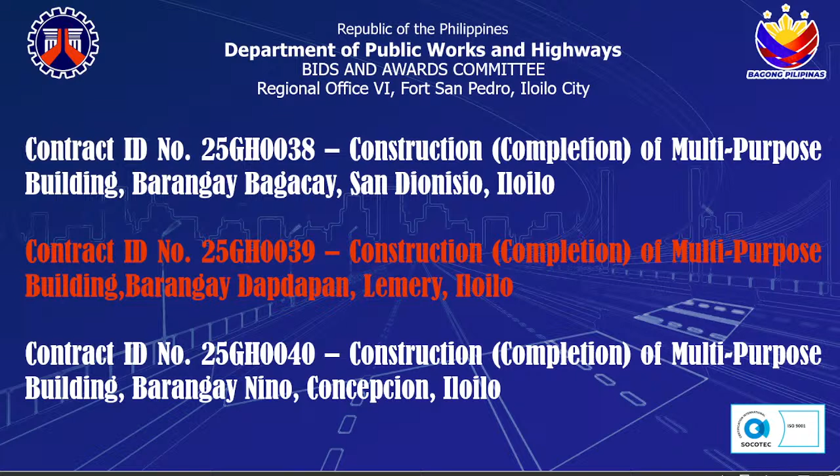And contract ID 25GH0041, construction completion of the multipurpose building, Barangay Agnaga, Concepcion, Iloilo. The technical working group will now present the data of these projects. Please go ahead.

For contract ID number 25GH0032, construction completion of multipurpose building, Barangay Almeñana Elementary School, Almeñana, Lemery, Iloilo. Location: Barangay Almeñana Elementary School, Almeñana, Lemery, Iloilo. Implementing Office: DPWH, Iloilo 3rd District Engineering Office. Funding Source: FY 2025 National Expenditure Program.

Approved budget for the contract: 1,980,000 pesos. Scope of works: completion of multipurpose building, including 3 layers bleacher with roofing both sides, canopy, repainting steel and concrete, 100mm thick concrete slab overlay for the gym, 75mm thick concrete slab overlay for the stage, gutter with downspout for gym and canopy, and electrical works. Contract duration: 100 calendar days.

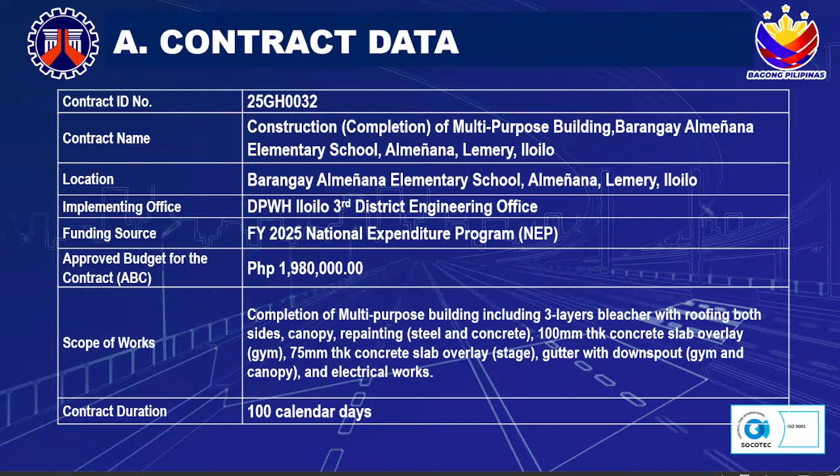For the major category of works: buildings, construction without piles, low-rise, concrete frame, 1 to 5 stories. For similar categories of works: buildings, construction with piles, high-rise, concrete frame, cast-in-place piles; buildings, construction with piles, low-rise, concrete frame, cast-in-place piles; buildings, construction with piles, high-rise, concrete frame, driven piles; buildings, construction with piles, low-rise, concrete frame, driven piles; buildings, construction without piles, high-rise, concrete frame; buildings, industrial plant, low-rise; buildings, industrial plant, high-rise; buildings, industrial plant, medium-rise. For the qualifier: buildings, construction without piles, low-rise, concrete frame, 1 to 5 stories.

Example of qualifier: not applicable.

For the list of key personnel: 1 project manager should have a minimum 5 years of total work experience and a minimum 5 years of experience in similar works. The same applies to 1 project engineer, 1 project inspector, 1 materials engineer, 1 safety officer, and 1 foreman.

For the list of key equipment units: 1 bagger mixer, 1 bar cutter, 1 bar bender, 2 welding machines, 2 cutting outfits, 1 generator set, and 2 concrete vibrators. Please take note of the capacity.

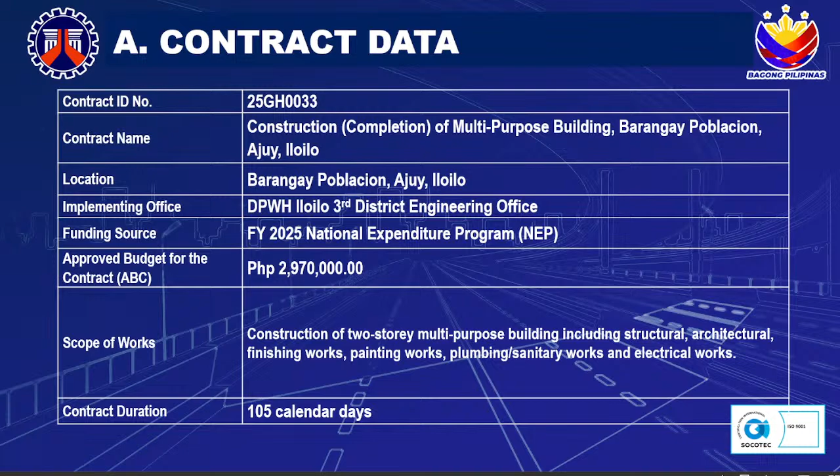Contract duration: 105 calendar days. For the major category of works: buildings, construction without piles, low-rise, concrete frame, 1 to 5 stories.

For similar categories of works: buildings, construction with piles, high-rise, concrete frame, cast-in-place piles. Buildings, construction with piles, low-rise, concrete frame, cast-in-place piles. Buildings, construction with piles, high-rise, concrete frame, driven piles. Buildings, construction with piles, low-rise, concrete frame, driven piles.

Buildings, construction without piles, high-rise, concrete frame. Buildings, industrial plant, low-rise. Buildings, industrial plant, high-rise. Buildings, industrial plant, medium-rise. For the qualifier, major category of works: buildings, construction without piles, low-rise, concrete frame, 1 to 5 stories. Example of qualifier: not applicable.

For the list of key personnel: one project manager should have a minimum 5 years of total work experience and a minimum 5 years of experience in similar work. The same applies to one project engineer, one project inspector, one materials engineer 1, one safety officer, and

one foreman. For the list of key equipment units: one bagger mixer, one bar cutter, one bar bender, 2 welding machines, one cutting outfit, one generator set, 2 concrete vibrators, and 1 jackhammer. Please take note of the capacity.

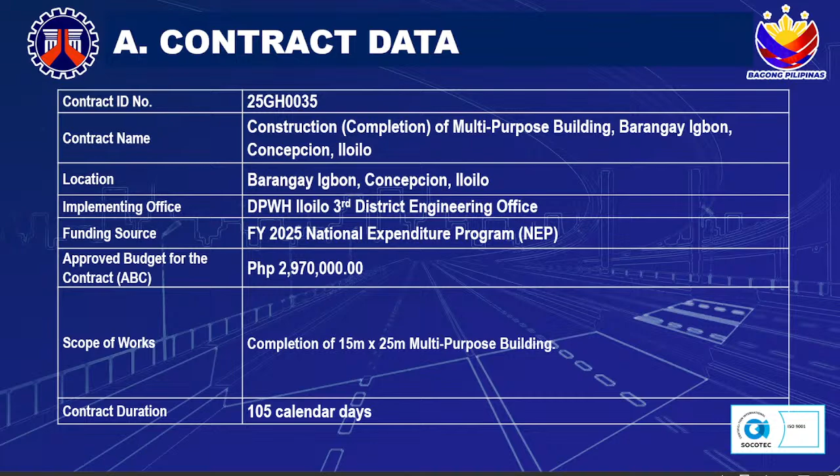Contract duration: 105 calendar days. For the major category of works: buildings, construction without piles, low-rise, concrete frame, 1 to 5 stories.

For similar categories of works: buildings, construction with piles, high-rise, concrete frame, cast-in-place piles. Buildings, construction with piles, low-rise, concrete frame, cast-in-place piles. Buildings, construction with piles, high-rise, concrete frame, driven piles. Buildings, construction with piles, low-rise, concrete frame, driven piles. Buildings, construction without piles, high-rise, concrete frame.

Buildings, industrial plant, low-rise. Buildings, industrial plant, high-rise. Buildings, industrial plant, medium-rise. For the qualifier, major category of works: buildings, construction without piles, low-rise, concrete frame, 1 to 5 stories. Example of qualifier: not applicable.

For the list of key personnel: one project manager should have a minimum 5 years of total work experience and a minimum 5 years of experience in similar works. The same with one project engineer, one project inspector, one materials engineer, one safety officer, and one foreman.

For the list of key equipment units: one bagger mixer, one bar cutter, one bar bender, two welding machines, one cutting outfit, one generator set, two concrete vibrators, and one jackhammer. Please take note of the capacity.

For contract ID number 25GH0036, construction completion of multipurpose building, Barangay Calaigang, San Rafael, Iloilo. Location: Barangay Calaigang, San Rafael, Iloilo. Implementing office: DPWH, Iloilo 3rd District Engineering Office. Funding source: FY 2025 National Expenditure Program. Approved budget for the contract: 2,970,000 pesos. Scope of works: construction of 10 meter by 14 meter multipurpose building.

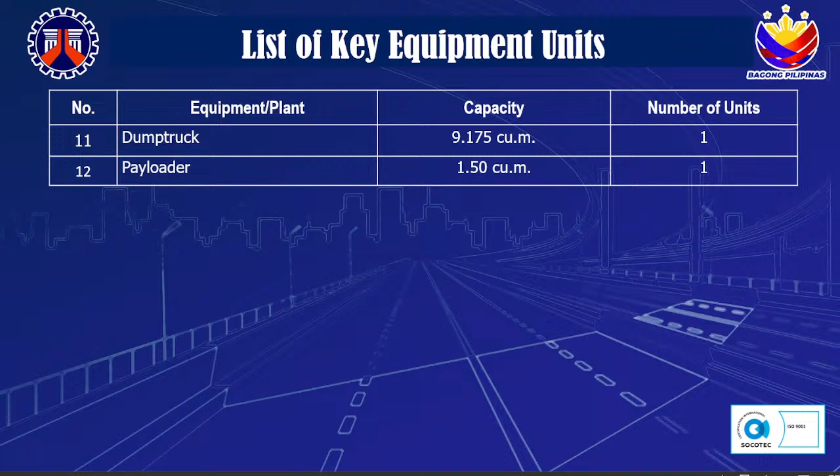For the list of key equipment units: two bagger mixers, one bar cutter, one bar bender, two welding machines, two cutting outfits, one generator set, two concrete vibrators, one backhoe, one jackhammer, one air compressor, one dump truck, and one payloader. Please take note of the capacity.

For contract ID number 25GH0037, contract name: construction completion of multipurpose building, Barangay Tanduyan, AJUY, Iloilo. Location: Barangay Tanduyan, AJUY, Iloilo. Implementing office: DPWH, Iloilo 3rd District Engineering Office. Funding source: FY 2025 National Expenditure Program. Approved budget for the contract: 2,970,000 pesos.

Scope of works: construction of 15 meter by 20 meter multipurpose building, including earthworks, plain and reinforced concrete works, painting works for steel, and roofing works. Contract duration: 105 calendar days.

For the major category of works: buildings, construction without piles, low-rise, concrete frame, 1 to 5 stories. For similar categories of works: buildings, construction with piles, high-rise, concrete frame, cast-in-place piles. Buildings, construction with piles, low-rise, concrete frame, cast-in-place piles. Buildings, construction with piles, high-rise, concrete frame, driven piles. Buildings, construction with piles, low-rise, concrete frame, driven piles. Buildings, construction without piles, high-rise, concrete frame.

Buildings, industrial plant, low-rise. Buildings, industrial plant, high-rise. Buildings, industrial plant, medium-rise. For the qualifier, major category of works: buildings, construction without piles, low-rise, concrete frame, 1 to 5 stories. Example of qualifier: not applicable.

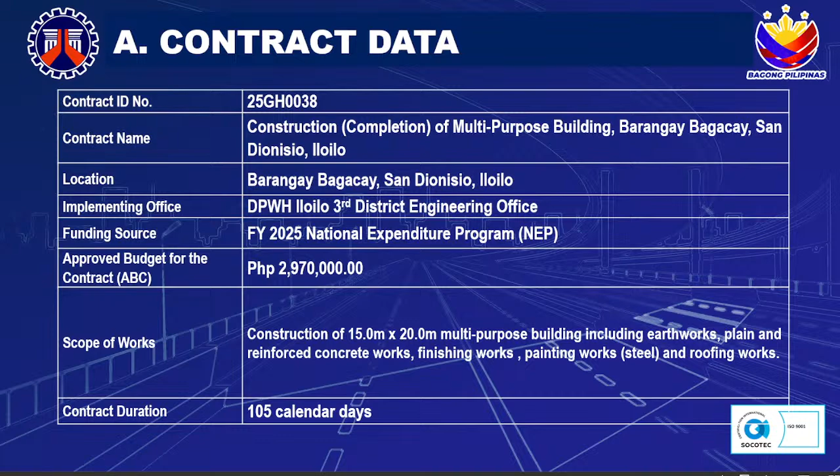Painting works for steel, and roofing works. Contract duration: 105 calendar days.

For the major category of works: buildings, construction without piles, low-rise, concrete frame, 1 to 5 stories. For similar categories of works: buildings, construction with piles, high-rise, concrete frame, cast-in-place piles. Buildings, construction with piles, low-rise, concrete frame, cast-in-place piles. Buildings, construction with piles, high-rise, concrete frame, driven piles. Buildings, construction with piles, low-rise, concrete frame, driven piles. Buildings, construction without piles, high-rise, concrete frame.

Buildings, industrial plant, low-rise. Buildings, industrial plant, high-rise. Buildings, industrial plant, medium-rise. For the qualifier, major category of works: buildings, construction without piles, low-rise, concrete frame, 1 to 5 stories. Example of qualifier: not applicable.

List of key personnel: one project manager should have a minimum 5 years of total work experience and minimum 5 years of experience in similar works. The same with one project engineer, one project inspector, one materials engineer, one safety officer, and one foreman.

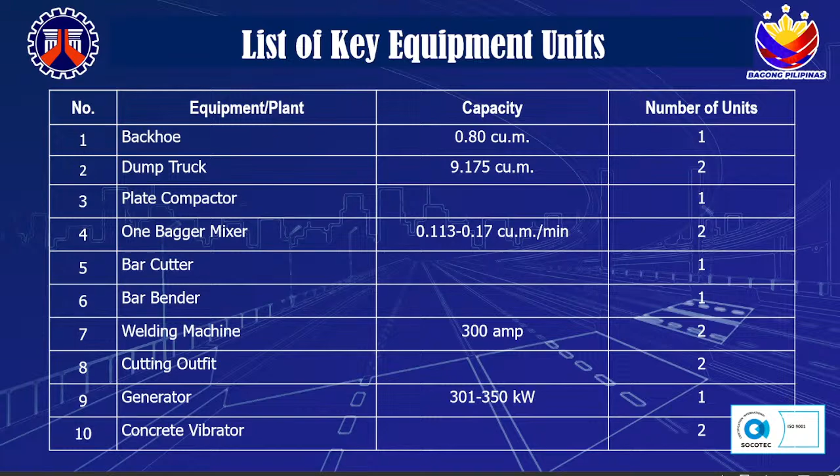For the list of key equipment units: 1 backhoe, 2 dump trucks, 1 plate compactor, 2 one-bagger mixers, 1 bar cutter, 1 bar bender, 2 welding machines, 2 cutting outfits, 1 generator set, and 2 concrete vibrators. Please take note of the capacity.

For contract ID number 25GH0039, contract name: construction completion of multipurpose building, Barangay Dapdapan, Lemery, Iloilo. Location: Barangay Dapdapan, Lemery, Iloilo. Implementing office: DPWH, Iloilo 3rd District Engineering Office.

Funding source: FY 2025 National Expenditure Program. Approved budget for the contract: 2,970,000 pesos. Scope of works: construction of 15-meter by 20-meter multi-purpose building. Work includes excavation, structural works, masonry works, and painting works for steel and masonry. Contract duration: 105 calendar days.

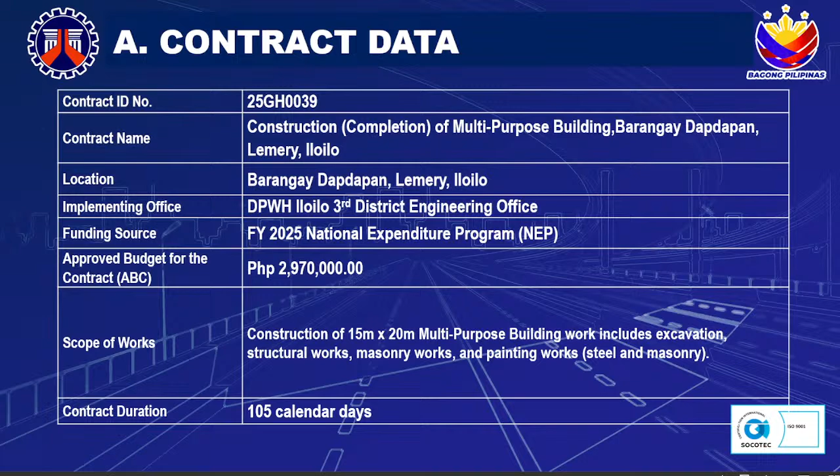For the major category of works: buildings, construction without piles, low-rise, concrete frame, 1 to 5 stories. For similar categories of works: buildings, construction with piles, high-rise, concrete frame, cast-in-place piles; buildings, construction with piles, low-rise, concrete frame, cast-in-place piles; buildings, construction with piles, high-rise, concrete frame, driven piles; buildings, construction with piles, low-rise, concrete frame, driven piles; buildings, construction without piles, high-rise, concrete frame; buildings, industrial plant, low-rise; buildings, industrial plant, high-rise; buildings, industrial plant, medium-rise.

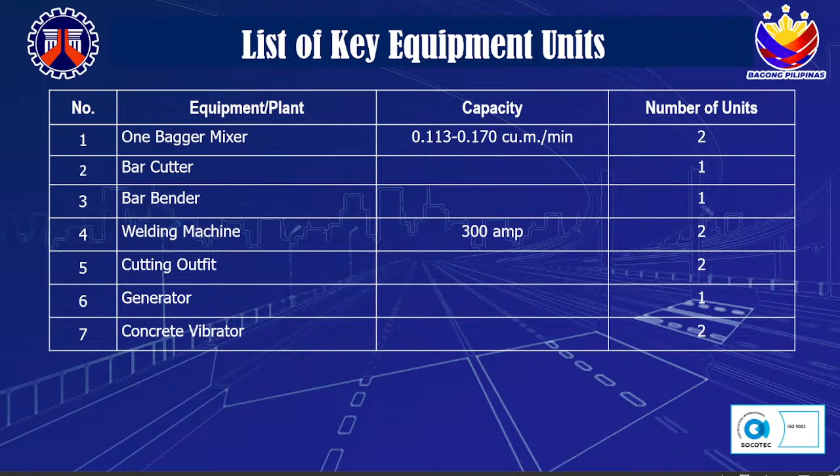For contract ID number 25GH0040, construction completion of multi-purpose building, Barangay Nino, Concepcion, Iloilo. Location: Barangay Nino, Concepcion, Iloilo. Implementing office: DPWH, Iloilo 3rd District Engineering Office.

Funding source: FY 2025 National Expenditure Program. Approved budget for the contract: 2,970,000 pesos. Scope of works: construction of 14-meter by 25-meter multi-purpose building, including earthworks, plain and concrete works, finishing works, roof framing, roofing, and painting works for masonry and steel. Contract duration: 105 calendar days.

For the major category of works: buildings, construction without piles, low-rise, concrete frame, 1 to 5 stories. For similar categories of works: buildings, construction with piles, high-rise, concrete frame, cast-in-place piles; buildings, construction with piles, low-rise, concrete frame, cast-in-place piles; buildings, construction with piles, high-rise, concrete frame, driven piles; buildings, construction with piles, low-rise, concrete frame, driven piles; buildings, construction without piles, high-rise, concrete frame; buildings, industrial plant, low-rise; buildings, industrial plant, high-rise; buildings, industrial plant, medium-rise. For the qualifier: buildings, construction without piles, low-rise, concrete frame, 1 to 5 stories.

Example of qualifier: not applicable. For the list of key personnel: 1 project manager should have a minimum of 5 years of total work experience and a minimum of 5 years of experience in similar works. The same applies to 1 project engineer, 1 project inspector, 1 materials engineer, 1 safety officer, and 1 foreman.

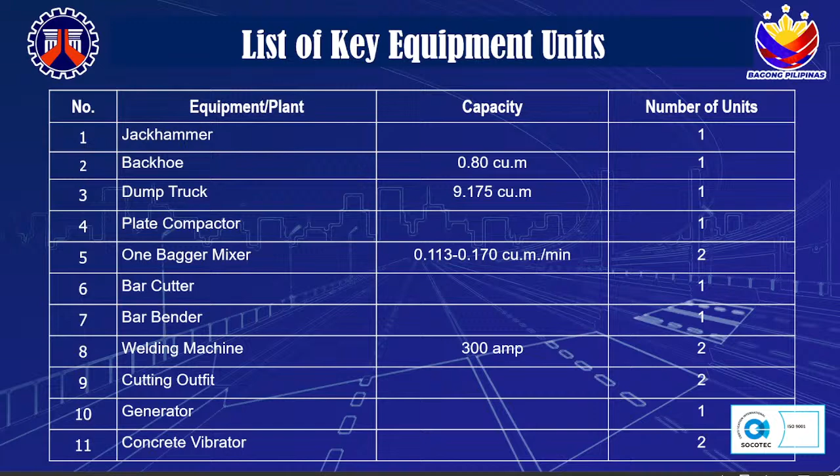For the list of key equipment units: 1 jackhammer, 1 backhoe, 1 dump truck, 1 plate compactor, 2 one-bagger mixers, 1 bar cutter, 1 bar bender, 2 welding machines, 2 cutting outfits, 1 generator set, and 2 concrete vibrators. Please take note of the capacity.

For contract ID number 25GH0041, construction completion of multi-purpose building, Barangay Agnaga, Concepcion, Iloilo. Location: Barangay Agnaga, Concepcion, Iloilo. Implementing Office: DPWH, Iloilo 3rd District Engineering Office.

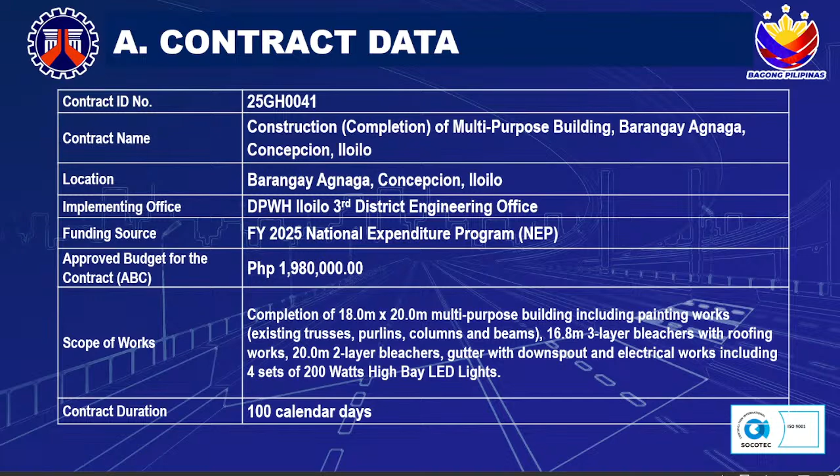Funding source: FY 2025 National Expenditure Program. Approved budget for the contract: 1,980,000 pesos. For the scope of works: completion of 18-meter by 20-meter multi-purpose building, including painting works on existing trusses, purlins, columns, and beams; a 16.8-meter 3-layer bleachers with roofing works; a 20-meter 2-layer bleachers; gutter with downspout; and electrical works including 4 sets of 200-watt high bay LED lights. Contract duration: 100 calendar days.

For the major category of works: buildings, construction without piles, low-rise, concrete frame, 1 to 5 stories. For similar categories of works: buildings, construction with piles, high-rise, concrete frame, cast-in-place piles; buildings, construction with piles, low-rise, concrete frame, cast-in-place piles.

Buildings, construction with piles, high-rise, concrete frame, driven piles. Buildings, construction with piles, low-rise, concrete frame, driven piles. Buildings, construction without piles, high-rise, concrete frame. Buildings, industrial plant, low-rise. Buildings, industrial plant, high-rise.

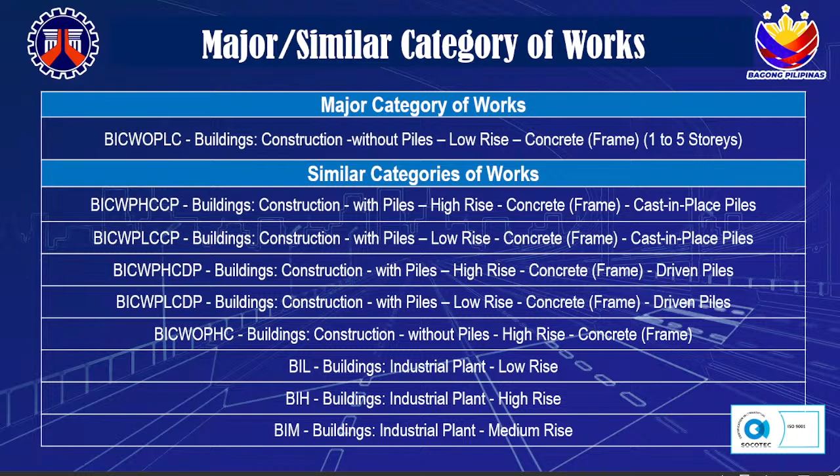Buildings, industrial plant, medium-rise. For the qualifier, major category of works: buildings, construction without piles, low-rise, concrete frame, 1 to 5 stories. Example of qualifier: not applicable.

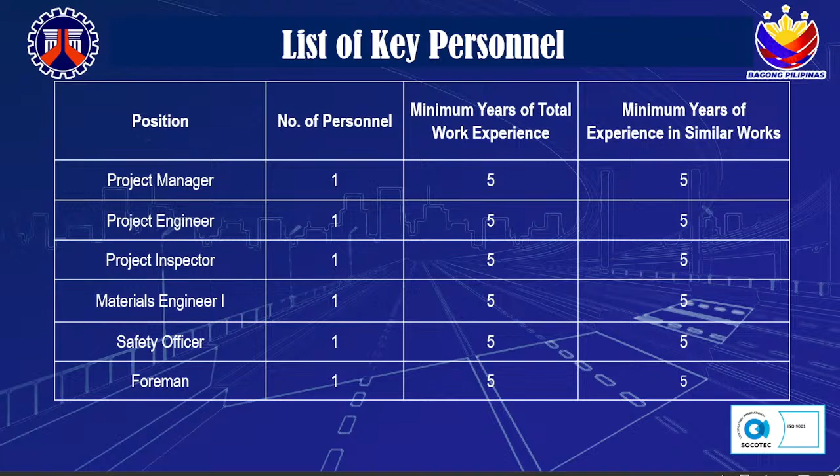The list of key personnel: one project manager should have a minimum 5 years of total work experience and a minimum 5 years of experience in similar works. The same with one project engineer, one project inspector, one materials engineer, one safety officer, and one foreman.

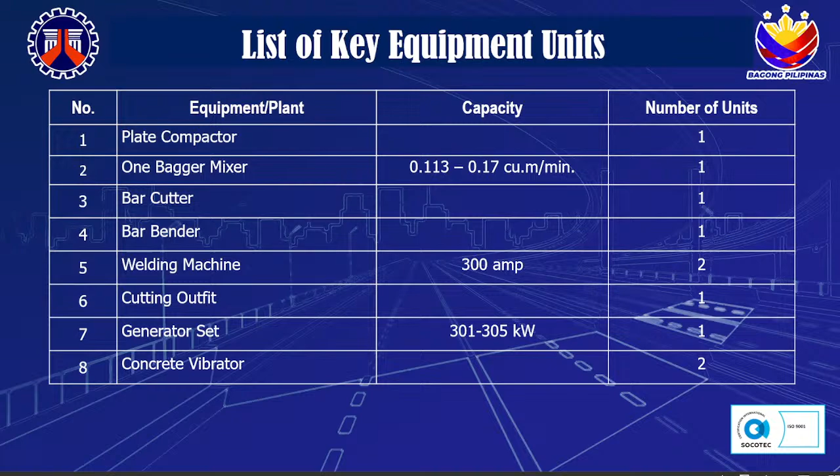For the list of key equipment units: one plate compactor, one bagger mixer, one bar cutter, one bar bender, 2 welding machine, 1 cutting outfit, 1 generator set, and 2 concrete vibrator. Please take note of the capacity.

For the list of key personnel for classification PE2, 10 contracts located within the same region for simultaneous assignments, but with an aggregate cost of 1.5 billion pesos.

For PE1, 10 contracts located within the same region for simultaneous assignments, each costing not more than 150 million pesos, but with an aggregate cost of 1 billion pesos.

For provisional project engineer, 10 contracts located within the same region for simultaneous assignments, each costing not more than 100 million pesos, but with an aggregate cost of 500 million pesos. Only accredited project engineers may be assigned to DPWH projects, subject to the following limits of assignment.

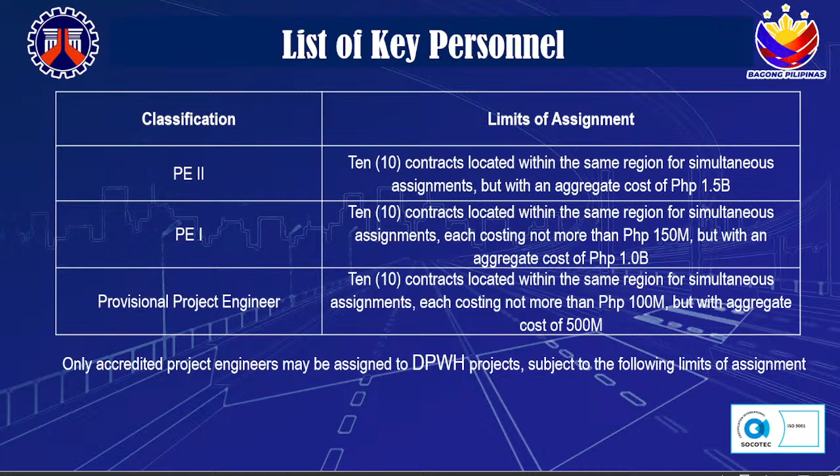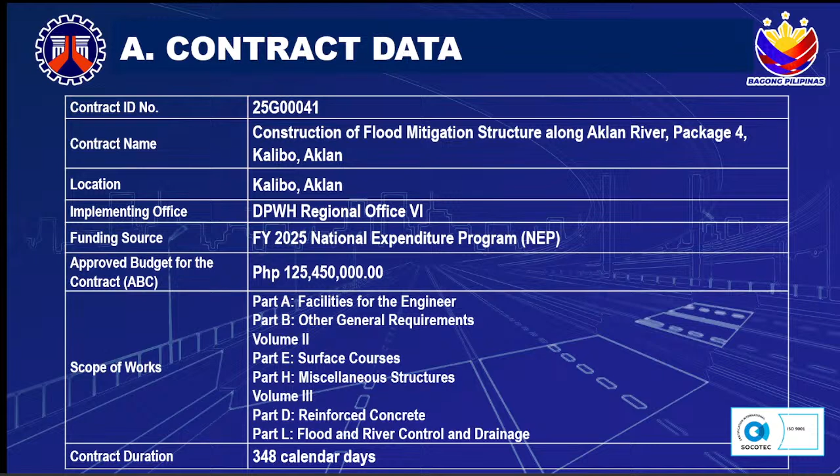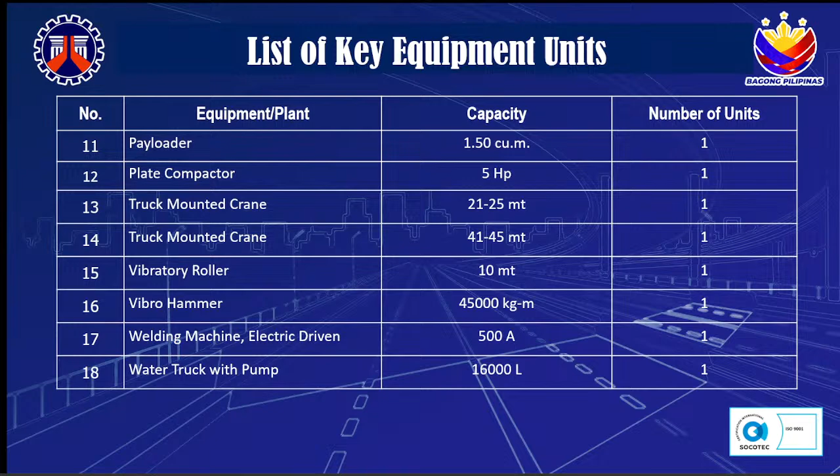Same with one project engineer, one project inspector, one materials engineer, one safety officer, and one foreman. List of key equipment units: one backhoe wheel type, one boom truck, one bulldozer, one cargo truck, two concrete vibrator, two dump truck, one generator set, one motorized road grader, one bagger mixer, one payloader, one plate compactor, one truck mounted crane, one vibratory roller, one vibro hammer, one welding machine electric driven, and one water truck with pump.

Please take note of the capacity. For contract ID number 25G00042, rehabilitation and major repair of the permanent bridges, Imelda Marcos Bridge, along Mandurriao-Sn, Cabatuan Road. Location, Cabatuan, Iloilo. Implementing Office, DPWH Regional Office 6. Funding source, FY 2025 National Expenditure Program. Approved budget for the contract,

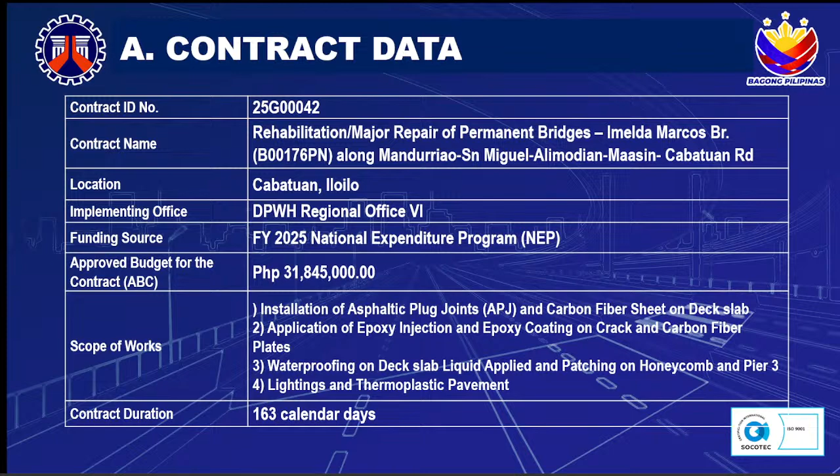31,845,000 pesos. Scope of works: installation of asphaltic plug joints and carbon fiber sheet on deck slab, application of epoxy injection and epoxy coating on crack and carbon fiber plates, waterproofing on deck slab liquid, applied and patching on honeycomb and pier 3, lightings and thermoplastic pavement, contract duration 163 calendar days.

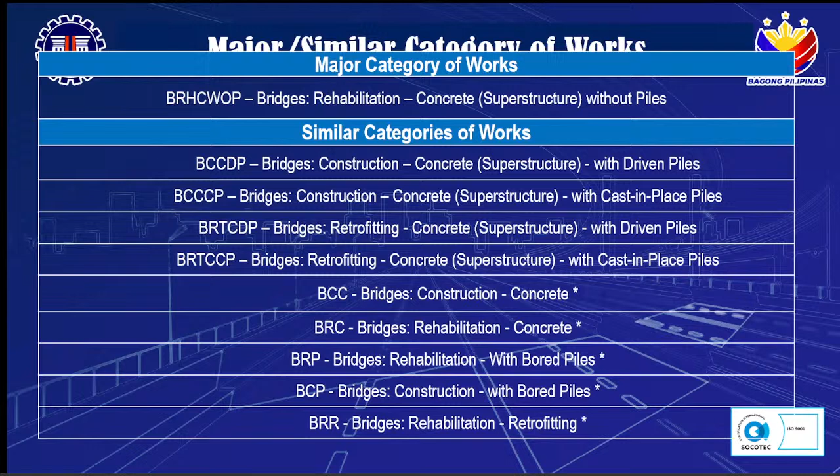Major category of works, bridges, rehabilitation, concrete superstructure without piles. Similar categories of works, bridges, construction, concrete superstructure with driven piles, bridges, construction, concrete superstructure with cast-in-place piles, bridges, retrofitting concrete superstructure with driven piles, bridges, retrofitting concrete superstructure with cast-in-place piles, bridges, construction concrete, bridges, rehabilitation concrete, bridges, rehabilitation with bored piles, bridges, construction with bored piles, bridges, rehabilitation retrofitting. Example, not applicable.

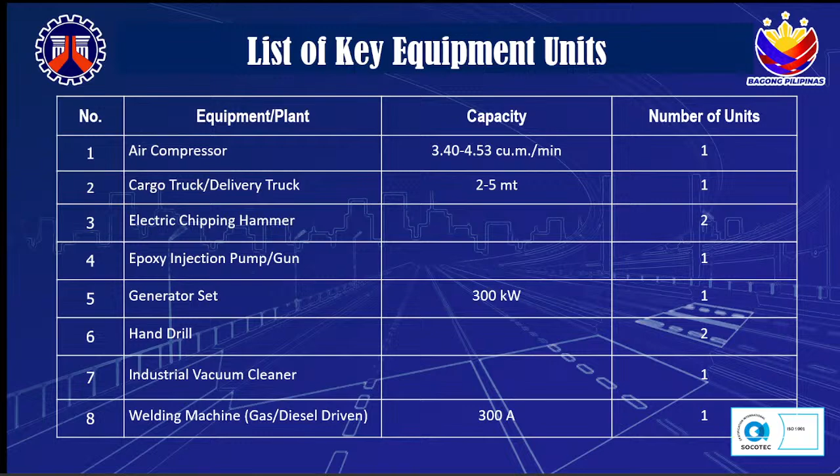List of key personnel, one project manager should have 5 minimum years of total work experience and 5 minimum years of experience in similar works, same with 1 project engineer, 1 project inspector, 1 materials engineer, 1 safety officer, and 1 foreman. List of key equipment units, 1 air compressor, 1 cargo truck or delivery truck, 2 electric chipping hammer, 1 epoxy injection pump or gun, 1 generator set, 2 hand drill, 1 industrial vacuum cleaner, 1 welding machine, gas or diesel driven. For contract ID number

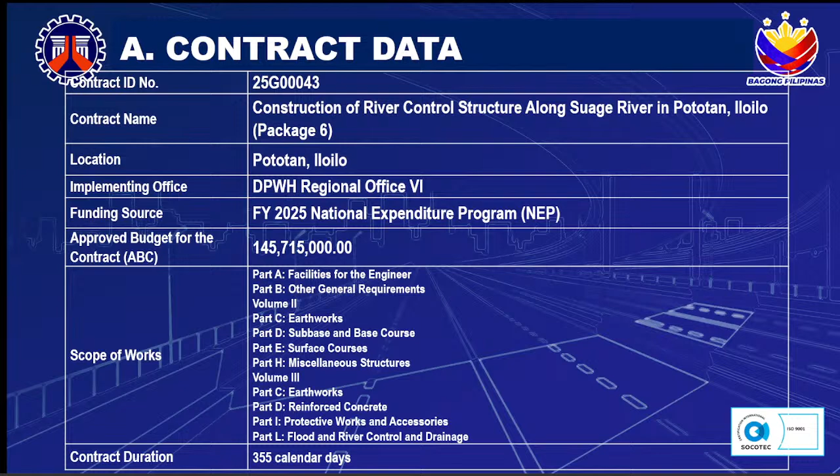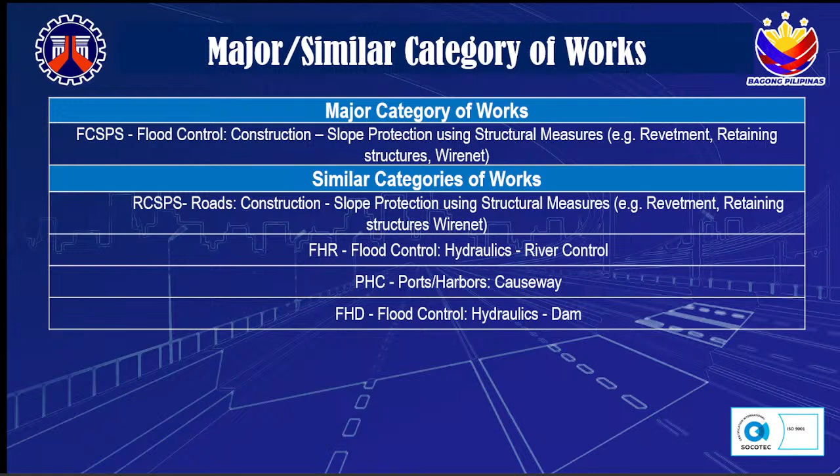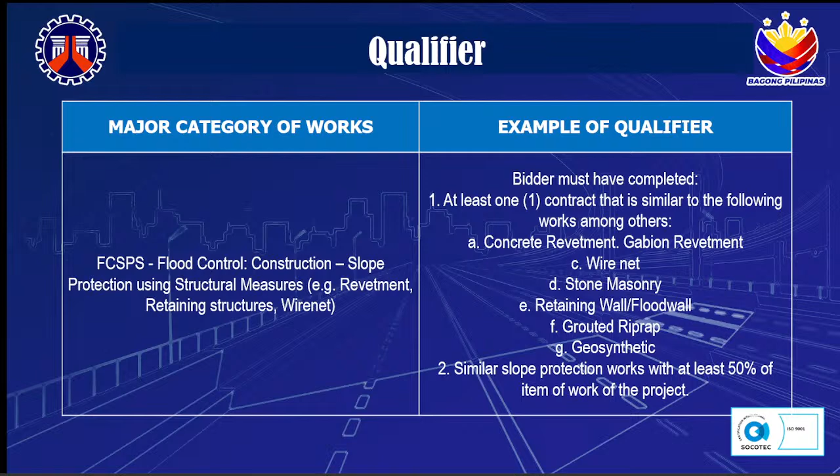Example qualifier, bidder must have completed at least 1 contract that is similar to the following works among others: concrete revetment, gabion revetment, wire net, stone masonry, retaining wall or floodwall, grouted riprap, geosynthetic, similar slope protection works with at least 50% of the item of work of the project.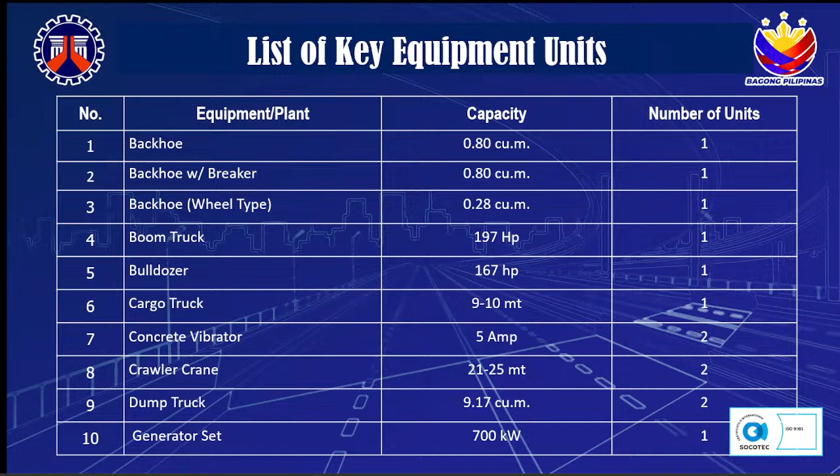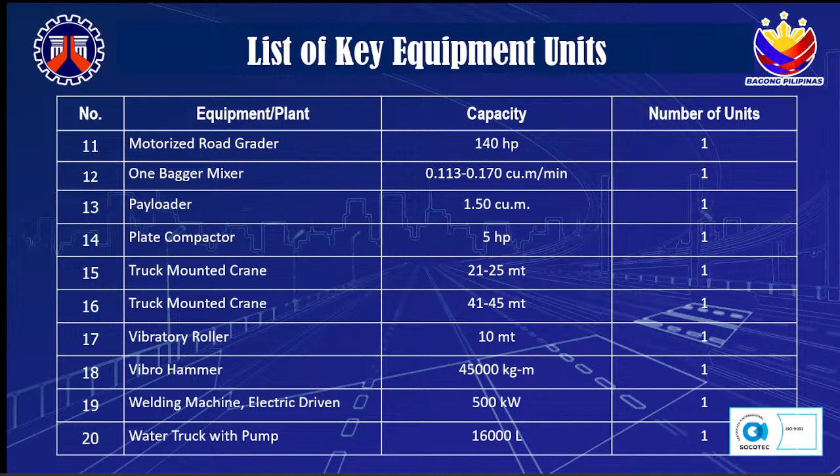List of key personnel, 1 project manager should have 5 minimum years of total work experience and 5 minimum years of experience in similar works, same with 1 project engineer, 1 project inspector, 1 materials engineer, 1 safety officer, and 1 foreman. List of key equipment units, 1 backhoe, 1 backhoe with breaker, 1 backhoe wheel type, 1 boom truck, 1 bulldozer, 1 cargo truck, 2 concrete vibrator, 2 crawler crane, 2 dump truck, 1 generator set, 1 motorized road grader, 1 one bagger mixer, 1 payloader, 1 plate compactor, 1 truck mounted crane, 1 truck mounted crane, 1 vibratory roller, 1 vibro hammer, 1 welding machine electric driven, 1 water truck with pump.

For contract ID number 25G00044, contract name Passi Bypass Road, Iloilo, location Passi City, Iloilo, implementing office DPWH Regional Office 6, funding source FY 2025 National Expenditure Program, approved budget for the contract 61,500,000 pesos. Scope of works, road opening of

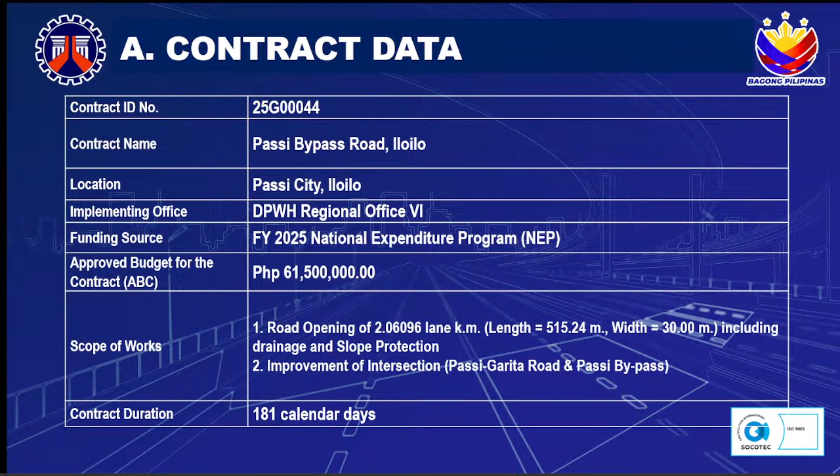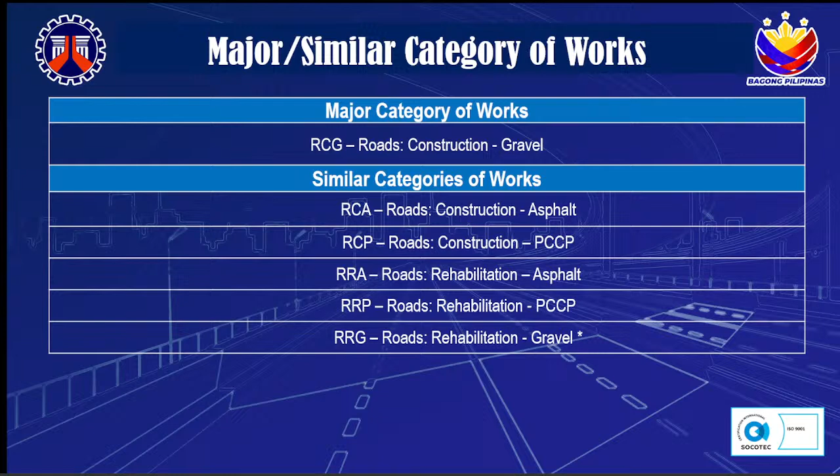2.06096 lane kilometer, including drainage and slope protection, improvement of intersection Passi to Garita Road and Passi Bypass. Contract duration 181 calendar days. Major category of works, roads, construction, gravel. Similar categories of works, roads, construction, asphalt, roads, construction, PCCP, roads, rehabilitation, asphalt, roads, rehabilitation, PCCP, roads, rehabilitation, gravel.

Example qualifier, not applicable. List of key personnel, 1 project manager should have 5 minimum years of total work experience and 5 minimum years of experience in similar works, same with 1 project engineer, 1 project inspector, 1 materials engineer, 1 safety officer, and 1 foreman.

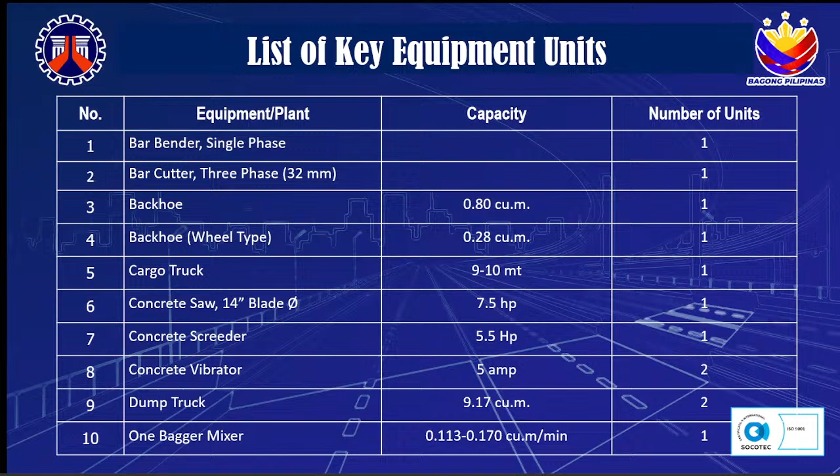List of key equipment units: 1 bar bender single phase, 1 bar cutter 3 phase 32mm, 1 backhoe, 1 backhoe wheel type, 1 cargo truck, 1 concrete saw, 1 concrete screeder, 2 concrete vibrator, 2 dump truck, 1 bagger mixer, 1 motorized road grader, 1 plate compactor, 1 vibratory roller, 1 water truck with pump, and 1 joint sealer machine.

For contract ID number 25G00045, contract name Panay East West Road, Iloilo Package 1, location Lambunao, Iloilo, implementing office DPWH Regional Office 6, funding source FY 2025 National Expenditure Program, approved budget for the contract 120,625,000 pesos.

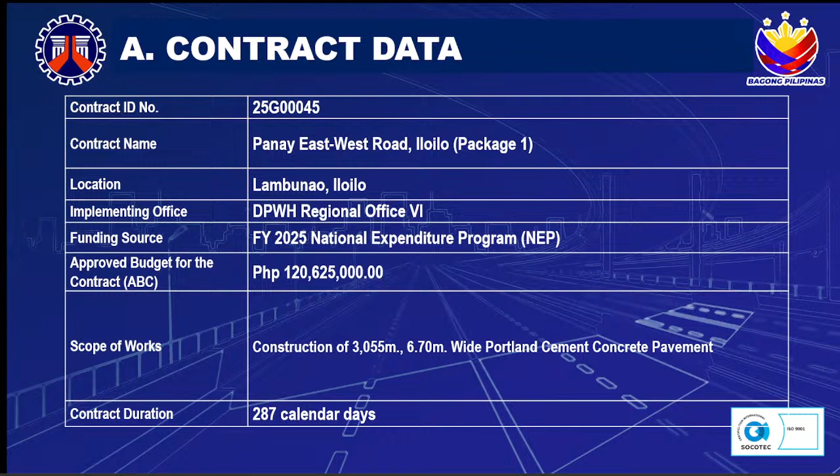Scope of works: construction of 3,055 meter, 6.70 meter wide Portland cement concrete pavement. Contract duration 287 calendar days.

List of key personnel: 1 project manager should have 5 minimum years of total work experience and 5 minimum years of experience in similar works. Same with 1 project engineer, 1 project inspector, 1 materials engineer, 1 safety officer, and 1 foreman.

For contract ID number 25G00046, contract name Bacolod Negros Occidental Economic Highway, Section 1, Victorias City, Negros Occidental. Location: Victorias City, Negros Occidental. Implementing office: DPWH Regional Office 6. Funding source: FY 2025 National Expenditure Program.

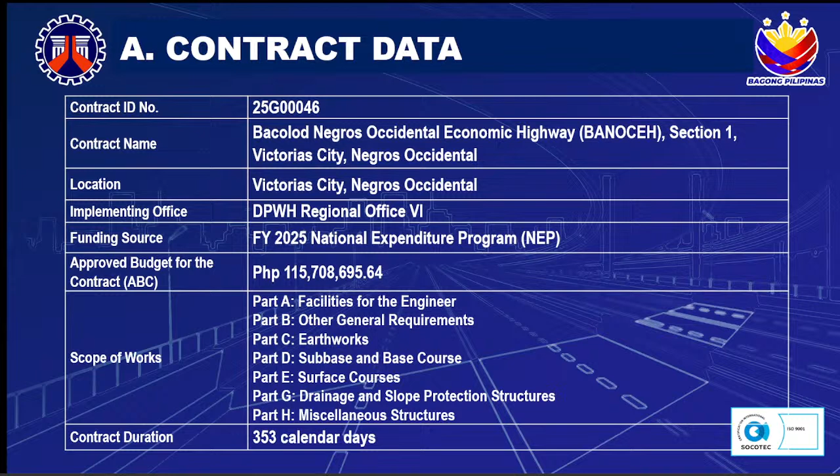Approved budget for the contract 115,708,695 pesos and 64 centavos. Scope of works: Part A, facilities for the engineer. Part B, other general requirements. Part C, earthworks. Part D, subbase and base course. Part E, surface courses. Part G, drainage and slope protection structures. Part H, miscellaneous structures. Contract duration 353 calendar days.

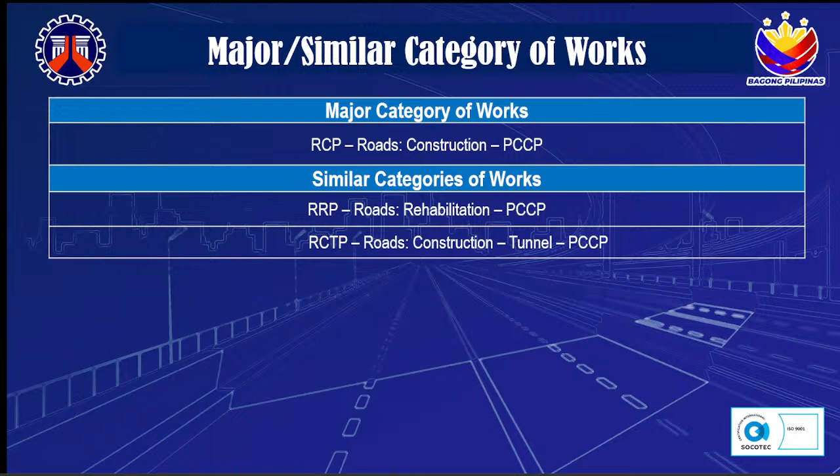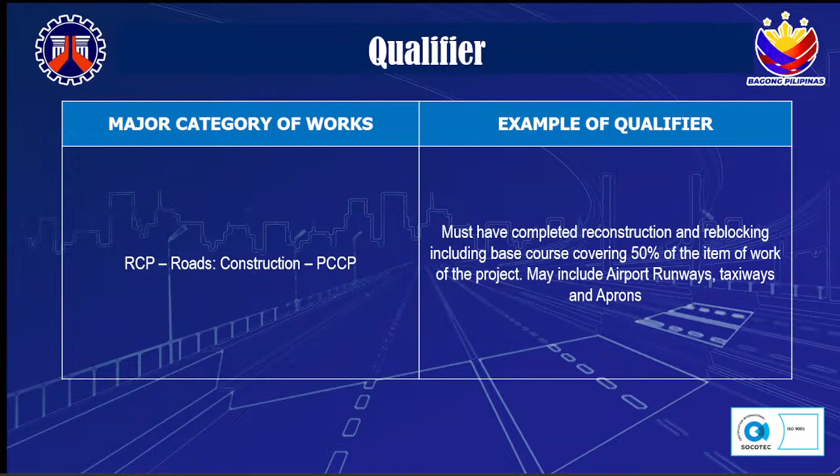Major category of works: roads construction PCCP. Similar categories of works: roads rehabilitation PCCP, roads construction tunnel PCCP. Example qualifier: leader must have completed reconstruction and reblocking, including base course covering 50% of the item of work of the project, may include airport runways, taxiways, and aprons.

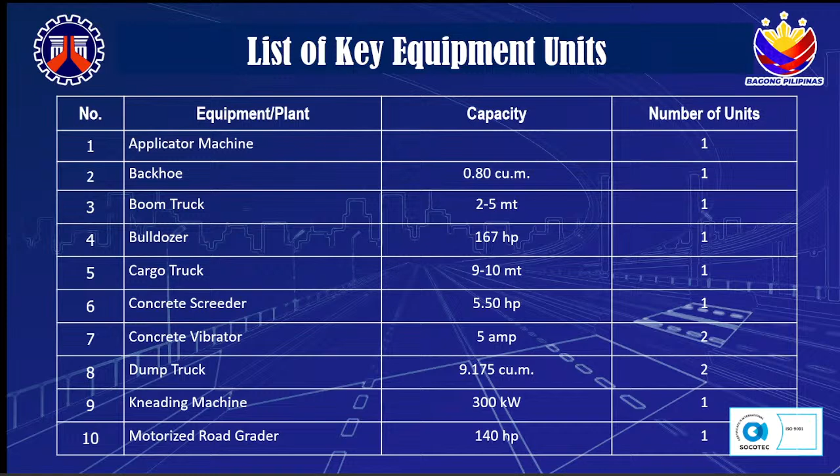List of classification: PE2, limiting assignments, 10 contracts located within the same region for simultaneous assignments, but with an aggregate cost of 1.5 billion. PE1, 10 contracts located within the same region for simultaneous assignments, each costing not more than 150 million pesos, but with an aggregate cost of 1 billion pesos.

Provisional project engineer, 10 contracts located within the same region for simultaneous assignments, each costing not more than 100 million pesos, but with an aggregate cost of 500 million. Only accredited project engineers may be assigned to DPWH projects, subject to the following limits of assignment.

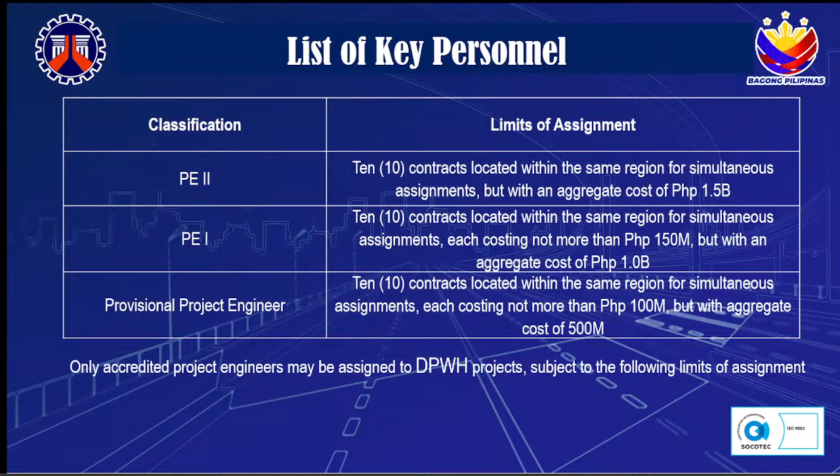Section 17 of the data sheet: only authorized licensed officers whose name appears on the contractor's registration certificate, with the presentation of his or her ID duly signed by its construction firm, shall be allowed to purchase and submit or drop bidding documents. Schedules: deadline for submission of clarification, November 15, 2024.

Deadline for submission of bids, November 26, 2024. Number of copies of a proposal: 1 original copy, technical and financial envelope of its bid. Place of submission of bids: bidding room, DPWH Regional Office 6, Fort San Pedro, Iloilo City.

Have Class A documents: legal documents, valid PhilGEPS registration certificate, platinum membership, all pages, as per GPPB Resolution Number 15, Series of 2021. Technical documents: statement of the prospective bidder of all its ongoing government and private contracts, including contracts awarded but not yet started, if any, whether similar or not similar in nature and complexity to the contract to be bid. Statement of the bidder's single largest completed contract similar to the contract to be bid, except under conditions provided under the rules, with certificate of acceptance.

Philippine Contractors Accreditation Board or PCAB license, or special PCAB license in case of joint ventures, and registration for the type and cost of the contract to be bid. Original copy of bid security in the prescribed form, amount, and validity period, or original copy of notarized bid securing declaration.

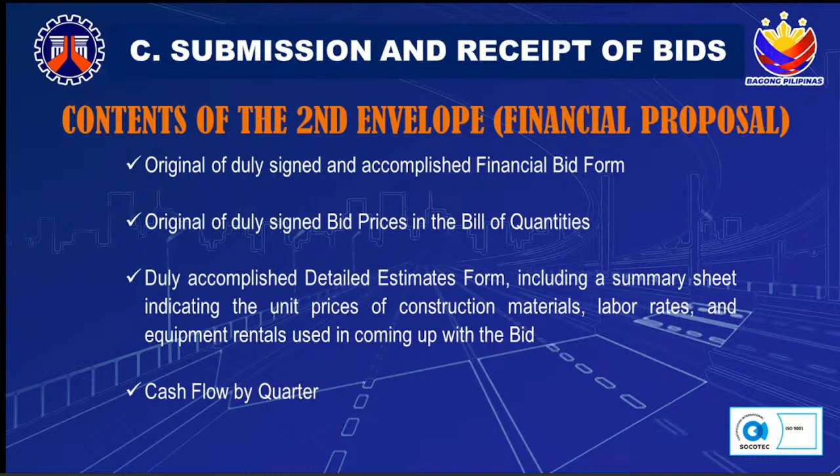For the submission and receipt of bids, here are the contents of the second envelope, or financial proposal: original of duly signed and accomplished financial bid form, original of duly signed bid prices in the bill of quantities, duly accomplished detailed estimates form including a summary sheet indicating the unit prices of construction materials, labor rates, and equipment rentals used in coming up with the bid, and cash flow by quarter.

Please take note that for manual submission of bids, the financial documents are preferably book-bound. The contents of financial documents are preferably numbered, paginated consecutively at the right top margin, and signed below the page number by a duly authorized representative, for both manual and electronic submission of bids. Any missing, incomplete, or patently insufficient documents in the required checklist is a ground for outright rejection or non-compliance of the bid.

So here are the common reasons for rejection of bids, ineligibility, and post-disqualification of bidders: failure to submit the original copy of the surety bond certified by the Insurance Commission indicating the name of project, the procuring entity, and name of contractor; shorter bid validity and bid security validity period.

Overlapping of pledged equipment and committed key technical personnel. Failure to indicate the validity of bid in the bid form, and late submission of bid. We also have failure to submit supporting documents, example, certification of availability of equipment from the equipment lessor or vendor for the duration of the project, if the equipment pledged is to be leased or purchased. Negative slippage of at least 15% in any one project, or negative slippage of at least 10% in each of 2 or more contracts. Unsatisfactory CPES rating.

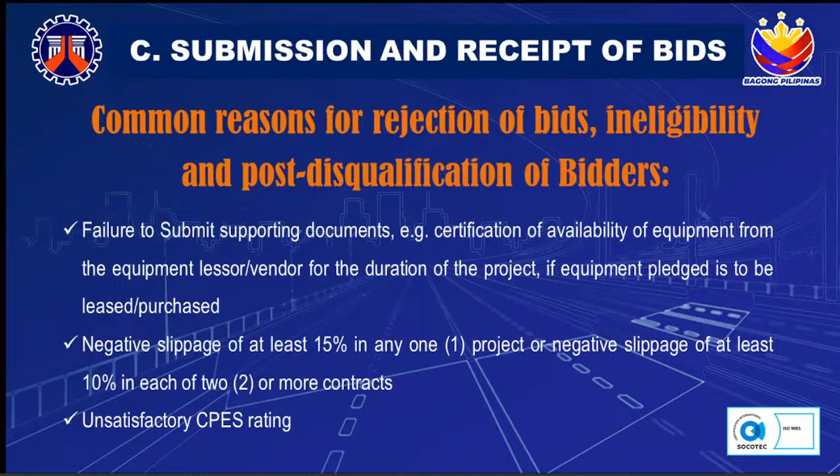Here are the common errors in the submission of bids. For single proprietor, the signatory should be the owner or proprietor only. For corporation or cooperative, the Board Secretary's Certificate and Board Resolution. For joint venture, resolution or agreement. For partnership, as indicated in the Articles of Partnership.

For the bid security, the bid validity period is 120 calendar days from the date of submission of bids. For the bid security validity period, it's also 120 calendar days from the date of submission of bids.

So the bidder shall submit a bid securing declaration or any form of bid security enumerated below: cash, cashier's or manager's check issued by a universal or commercial bank, bank draft, guarantee, or irrevocable LC issued by a universal or commercial bank.

The amount of bid security for the mentioned items, not less than a percentage of the ABC, is 2%. For surety bond callable upon demand issued by a surety or insurance company duly certified by the Insurance Commission as authorized to issue such security, it is 5%.

For the bid evaluation, the financial component of the bids of each bidder shall be evaluated using non-discretionary criteria, including arithmetical corrections for computational errors, to determine the correct total calculated bid prices. The BAC shall automatically disqualify any total calculated bid price which exceeds the ABC. Here are the following factors to be considered in the evaluation of the bid prices.

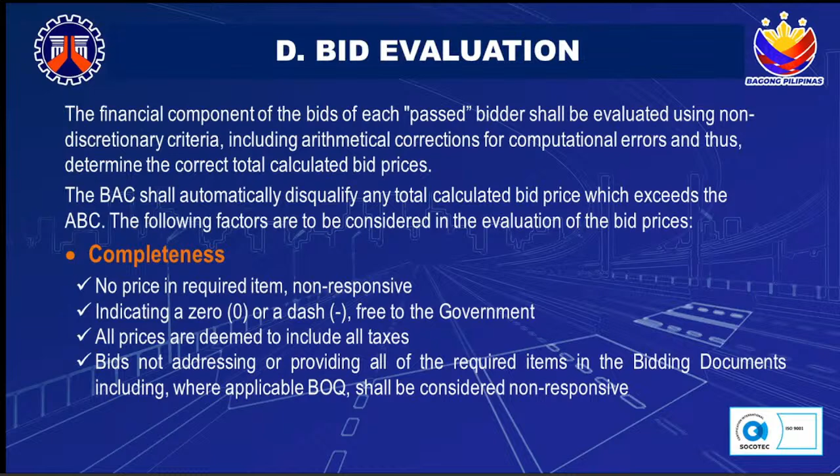For completeness, no price in a required item, indicated by a 0 or a dash, is non-responsive and free to the government. All prices are deemed to include all taxes. Bids not addressing or providing all of the required items in the bidding documents, including where applicable the BOQ, shall be considered non-responsive. For arithmetical corrections: bid prices in figures versus words, words prevail.

For total price per item versus unit price per item, unit price prevails. Total price versus actual sum of component items, actual sum prevails. Unit cost in detailed estimate versus unit cost in BOQ, BOQ prevails. If above the ABC, it is disqualified.

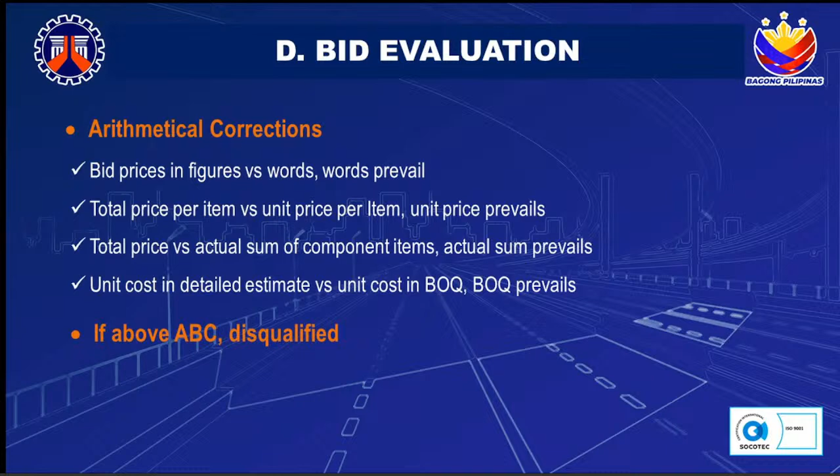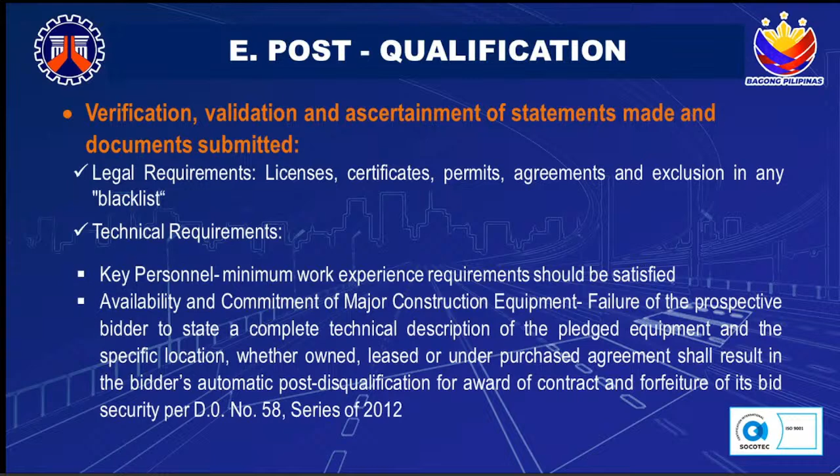For technical requirements: key personnel minimum work experience requirements should be satisfied, and availability and commitment of major construction equipment. Failure of the prospective bidder to state the complete technical description of the pledged equipment and the specific location, whether owned, leased, or under purchase agreement, shall result in the bidder's automatic post-disqualification for award of contract and forfeiture of its bid security, as per DO number 58, series of 2012.

For technical requirements: performance in ongoing government and private contracts - negative slippage of at least 15% in any one project, or negative slippage of at least 10% in each of 2 or more contracts. Failure of the contractor to commence repair works and complete ongoing contracts within the prescribed date after receipt of the notice of defects and deficiencies.

Failure of the contractor to commence repair works on contracts with pending certificates of acceptance within the prescribed date after receipt of the notice of defects and failures. Substandard quality of works or unsatisfactory performance per contract conditions at the time of inspection.

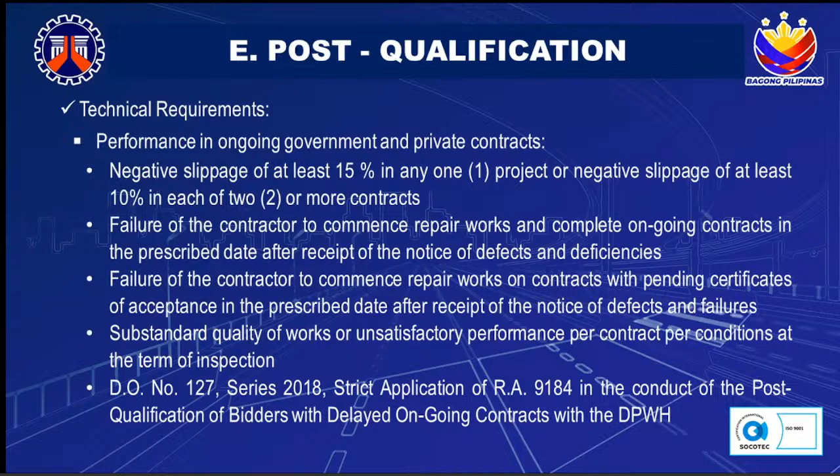DO number 127, series of 2018: strict application of RA 9184 in the conduct of post-qualification of bidders with delayed ongoing contracts with DPWH. Authenticity and correctness of bid security, financial requirements, bid price proposal, and NFCC.

Here are the notes on the personnel and equipment requirements of the project as per DO number 9, series of 2012, or technical requirements for civil works projects for public bidding. If a proposed key technical personnel is an employee of the bidder and working on another project at the same time as the bidding,

the bidder shall submit a certification that: one, the personnel will be pulled out from the ongoing project once the bidder is awarded the contract, and two, he or she will be replaced with another person with equal or better qualifications as certified by the head of the implementing office.

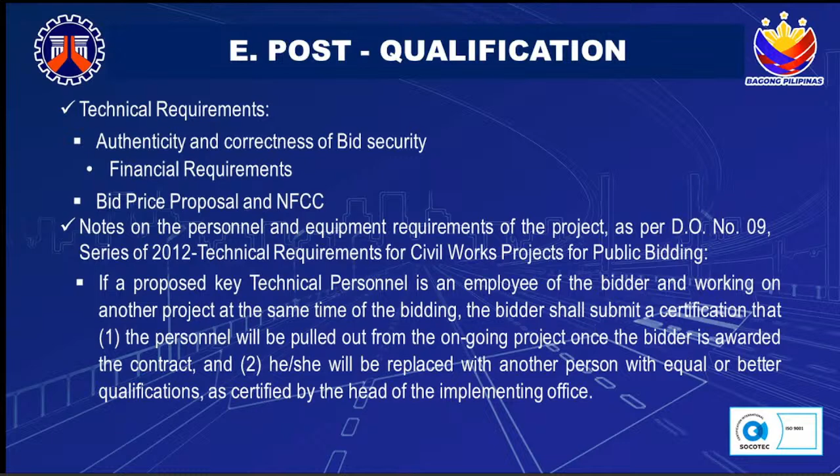Also, the bidder may propose a key technical personnel who is not its employee, provided that the said personnel is required to submit a certification that he or she will work for the bidder if it is awarded the contract under bidding. These certifications shall be included in the first envelope of the sealed bid.

Also, to be verified during post-qualification is the set of equipment pledged by the bidder. The bidder should specify in the submitted bid the location of the equipment where they can be inspected, and if any equipment is not in the specified location, then the bidder shall be post-disqualified.

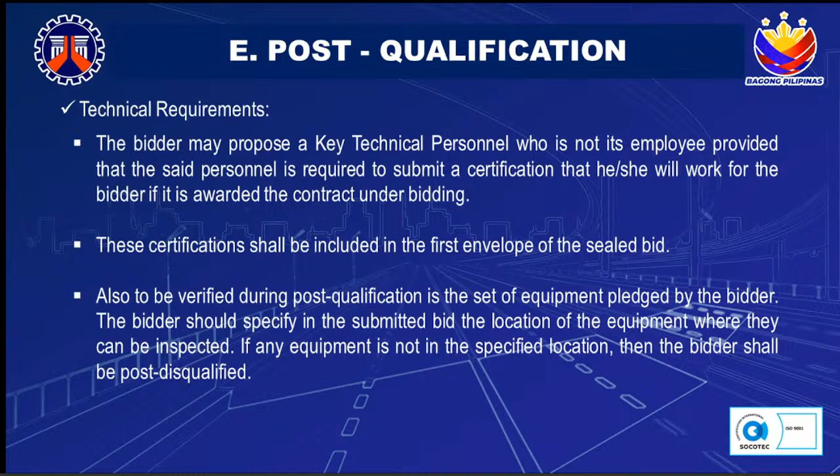So for the contract award, the contract shall be awarded to the bidder whose bid has been determined to be the lowest calculated and responsive bid as a result of the detailed evaluation and post-qualification conducted. Contract award should be made within the bid validity period. Subcontracting is not allowed.